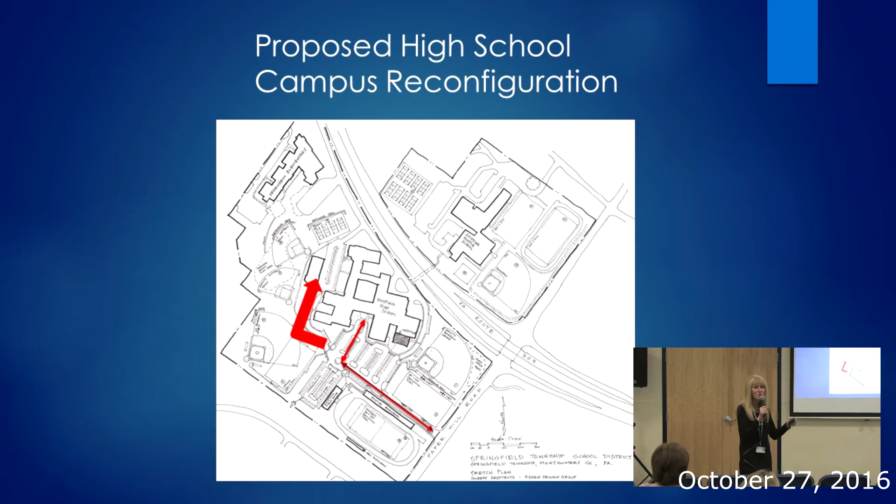So we did a survey. Did anybody here fill out the survey? Thank you, we really appreciate it. We got about 250 responses, which is phenomenal.

We're very appreciative, and before Dave comes on I want to quickly talk about the questions we asked and the results we got. These are actual results, unfiltered. I'm not commenting on what people wrote, this is what they said.

So the first question pertained to the stadium and track area. Do you have any additional suggestions? What are your concerns, comments, and so forth? The number one overwhelming question was not about the utility of turf fields, but the safety and the research out there that seems to be conflicting.

There's some research out there that says turf fields are fine, especially in this day and age. They're much more improved than they ever were before. There's no risk for health reasons, nobody needs to worry. On the other side of the coin, however, there is a body of research that says...

depending upon the types of materials being used, there are carcinogens in some of the materials, and some people who play for a continuous amount of time on turf fields can be at risk for health issues. We are looking very carefully at all of that research, and if we were to make the determination to go ahead with turf, Dave can address this because he's an architect and works in a lot of places that use turf fields.

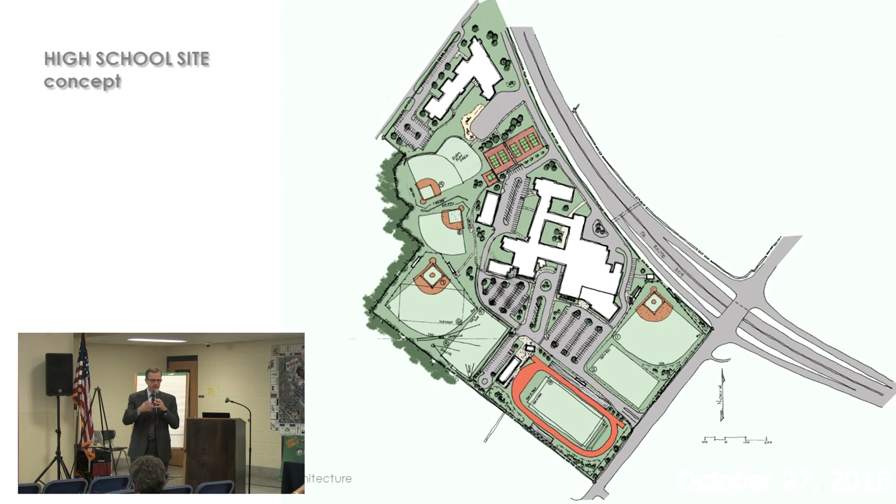What they'll do is the traffic study will be conducted at three or four different times during the day, and they'll try to pick up all of those major issues. There'll be rush hour times, and then they'll pick up all of the school access and egress times. So it's going to be a really interesting study. Might be a little scary to look at for all of us, but it'll be a reality.

So that's some of the circulation through. One of the other things you heard Dr. Hacker react to as part of the survey was the front door. Now, to some extent, it's kind of a misnomer that you don't have a front door. The front door is not visually accessible as you drive up. That's the reality. The front of the building is actually a pretty handsome building. It was reconstructed a number of years ago and is a good-looking front door to the building, and the question is how do you get people to it.

So that's what we're trying to do here. We're trying to create a bit more of a boulevard that you come down next to the stadium, and as soon as you get into that—we'll call it a parent drop-off lane, but it's a pickup and drop-off boulevard—it leads you right to the front door. So now there's a real visual access back and forth to the playing fields and back to the academics. Then we pick up a large amount of parking between these two areas, which will be an increase over the current parking you have. So that's how we structured the internal part of the site, and it seems to help out quite a bit with the circulation from Haws Lane as well as from Paper Mill Road.

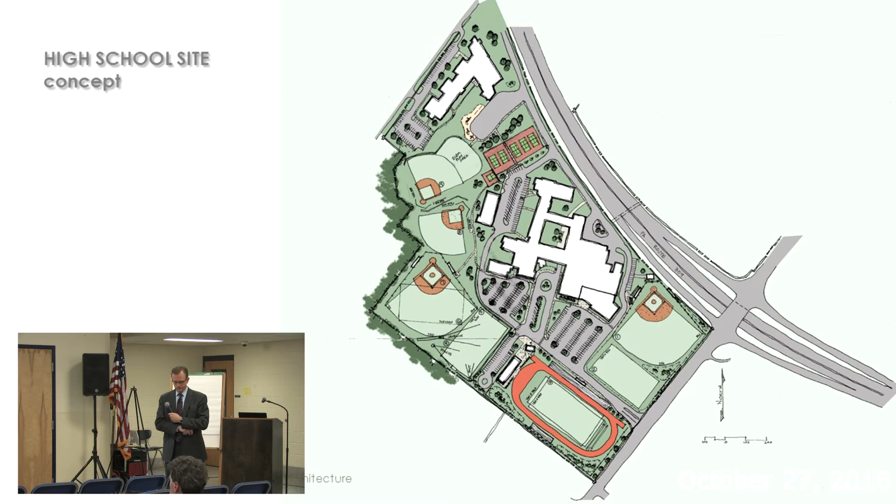So the other challenge then, once you get past that, is where do you locate all these? As that picture is configured, if that were to be the way it ends up working out, does that disconnect connecting Erdenheim? No, not at all.

Actually, I'm not orienting you very well. This is the parking lot that you likely parked in right out here, and there's the facilities building. So it sneaks around right behind over here and comes down next to where your current tennis courts are. So instead of it being by the cafeteria that you go around, you now connect it from the back. You could literally go through this parking lot and down and around. If it was sunlight, you would see it—it would be right out here. So you'd be connecting back this way instead of connecting in front of the cafeteria. Or do both.

So that starts to alleviate some of the issue with the bus turnaround as one of the major issues.

Back to the playing fields, when you count up all of your spring sports and fall sports, the end result is at any one point in time you probably need four playing fields plus a stadium, and then you need two baseball and two softball to make all of this work. That's about what it amounts to when you start to really stack it all up. So as you already heard, one of the things we'll be trying to do is redo the stadium with all of the playing lines, or at least three sets of playing lines, so that we can start to use that for multiple sports.

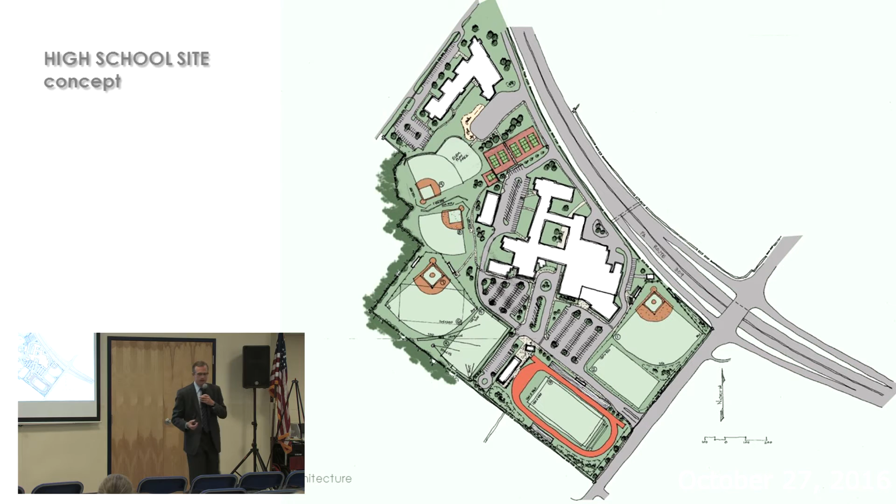The intent would be that we'd set this up as a soccer field. We'd set this up, depending on when it's being used for competition, as another one. And then, of course, you've got your field hockey. What we would do is set it up, and this is pulled up into the diamond, but we'd pull it back down into the turf itself, or the grass. I have to differentiate between turf and grass. So what we were able to get was three of those fields, and we're struggling to find the fourth. We're going to keep working on that until we get somewhere with it.

I don't know if my kids play field hockey. Why is it not just a multi-purpose field? What's going to make it specifically different?

The truth is, it is multi-purpose, but we're trying to set it up so it has an advantage for at least one of the sports that has a harder time on the other turf. It'll just have a slightly different depth to it — depth of turf, the type of turf it's laid with.

But other sports will be able to use it for practice. So in the spring, you're going to have not just lacrosse, but baseball that can't go into the fields but can still use a turf facility for fielding.

Exactly. Well, the same issues come up when you start talking about those sports — track becomes a challenge, right? And how you get all the track events. So we're going to have to find a way to get our javelin, shot put, and all of those things in an outfield area so that they don't cross paths during the same season. We're trying to set all of those pieces up so they all work at the same time, and as you can see, you've only got so much real estate.

It seems to be fitting, with the exception of one field.

I'm not really very athletic, so if this is a stupid question, I apologize — why can't you play softball on a baseball field? Why do you have to have separate ones?

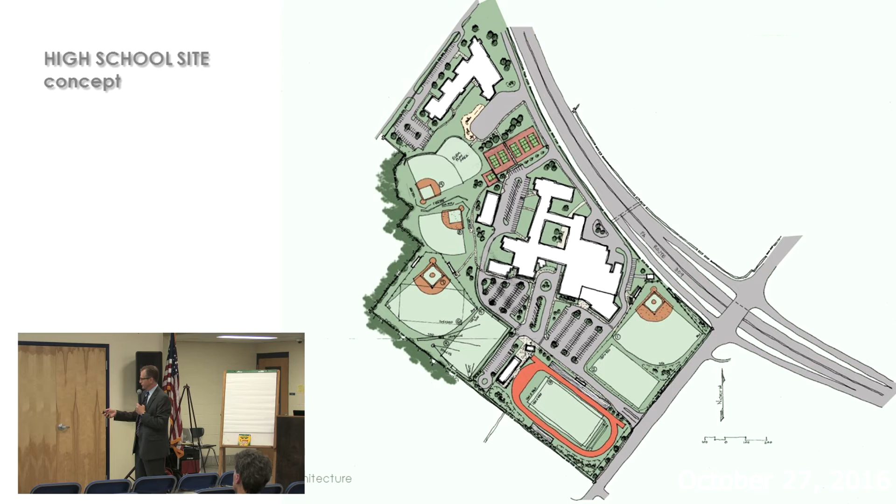Let me share a couple other ideas here so you can see what is starting to take shape. So that's kind of the site as a whole. We're going to focus just a little bit to try to get you a sense. And again, this at least you can tell is very sketchy. It's all sketch concepts, and we're just starting the process.

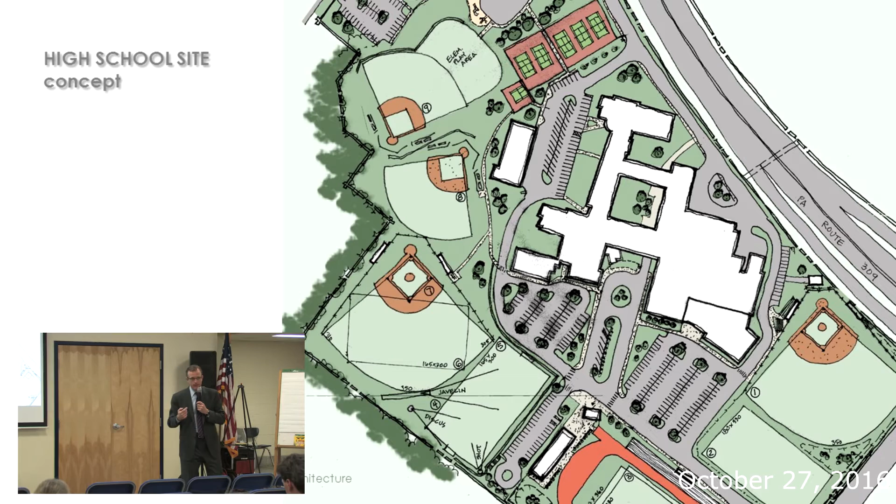So the circulation, a couple of things to take into account. You start to see a little bit larger paved area here, or sidewalk area. That would be what we would propose as a new entry to the athletic complex, the indoor athletic complex. So it would be the new gym entry. Some of those things that Dr. Hacker was addressing that are issues with the lobby entry area, with some of the athletic spaces that are available from the parking lot.

So would that be, and I'm comparing it just to Upper Dublin because we're there for a lot of sport events, would it kind of be like an athletic entrance?

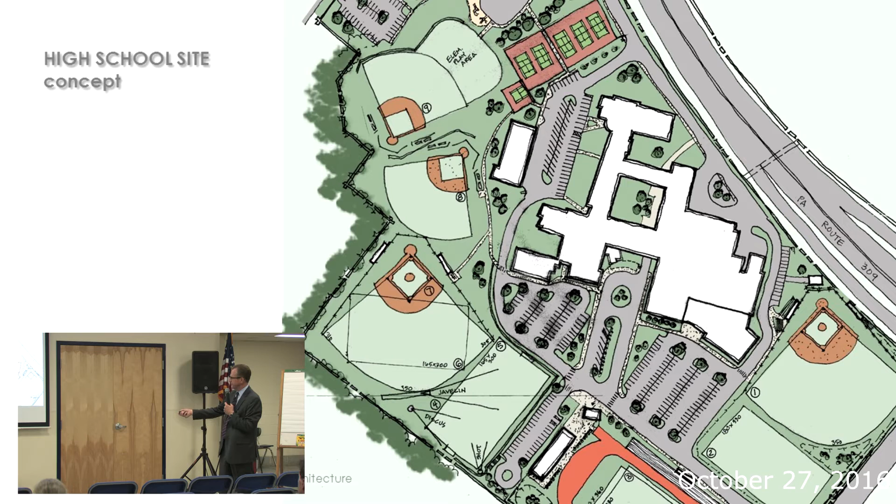I might be able to help you with that in a slide here. Let's see if we can get somewhere. So for better or for worse, we did take some shots at it, but this is part of why we're here talking to you, to get some feedback on these. So as you can see, there's a front entry, which you now would pull right up to, and then there's also an athletic entry. So just to show you, this is the parking lot, or the access points with the tennis courts and so on.

So we see this as a phase one and phase two, and there's a real reason for this phase one. The phase one, we're trying to get the field artificial turfed, or synthetic turfed, and I should say the stadium field, because the goal really is to have that as one of your swing fields while you're doing the construction on any of the other fields. And that's a really big issue.

But what it does is, if we can get this work done, it will give us at least a little bit of swing space while we start to do all of the work on these, so you can start to schedule some of this. That's not to say you're not going to be doing a lot of scheduling of your playing in other locations during construction of this, and that's yet to be worked out. We're just in the preliminary conversations about how you do that.

So that is a preliminary sketch of the beginnings of at least several of the different playing configurations and lining on that field. This is by no means an end result. So that's kind of the beginning of what you'll see.

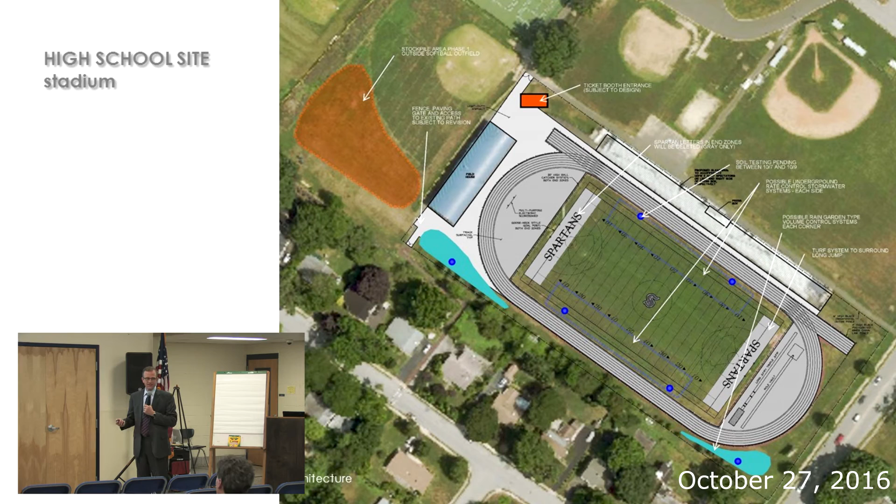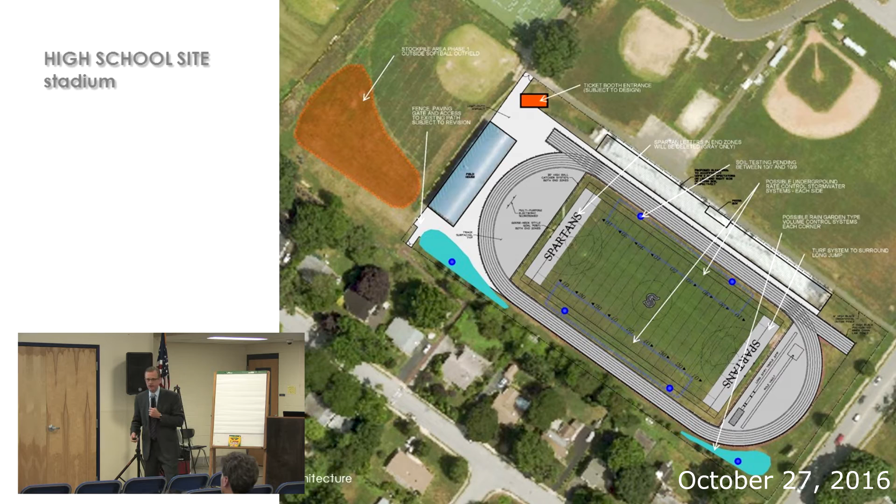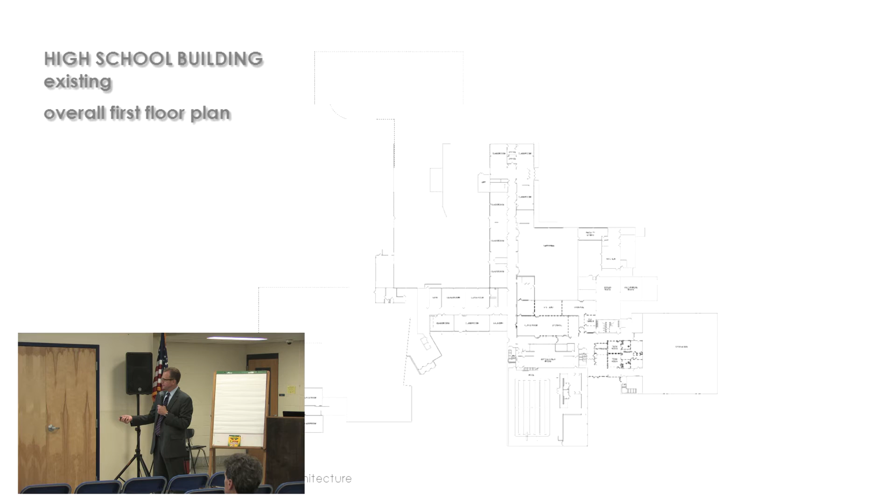This is a little hard to see, but this is the current pool, and here's your gymnasium, and you know this front entry point here. This is the entry doors that Dr. Hacker showed in the slides previously. This will get bigger, so don't strain your eyes yet, but if you watch the back and forth there, you can start to see where some of the work in the building will be done.

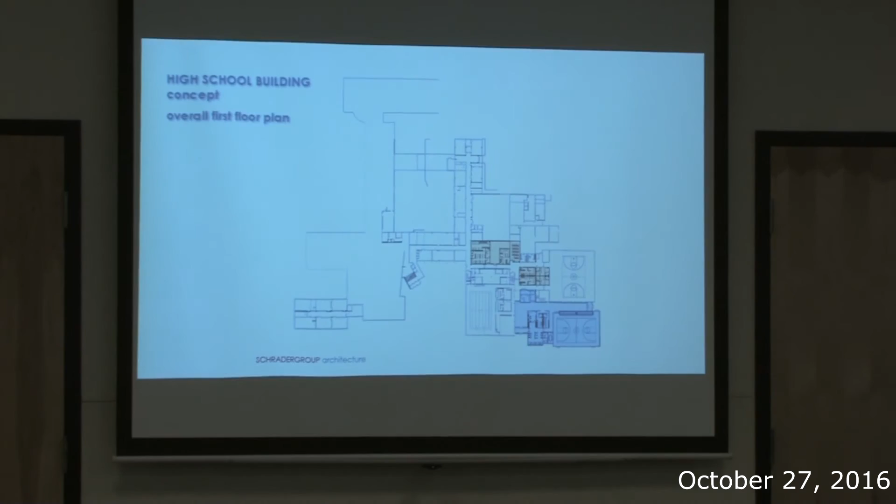So what we're dealing with here as we get into the spaces, we've got a variety of TV studios, classroom and athletic director spaces right here. We have team room, trainer, and so on in this space, and nothing out here. The girls' locker room, of course, is up above on the second floor. So what we're trying to do with this concept is bring the girls' locker room down directly across from the boys' locker room so that all of the locker room spaces, including a variety of team rooms, are now down on the ground floor.

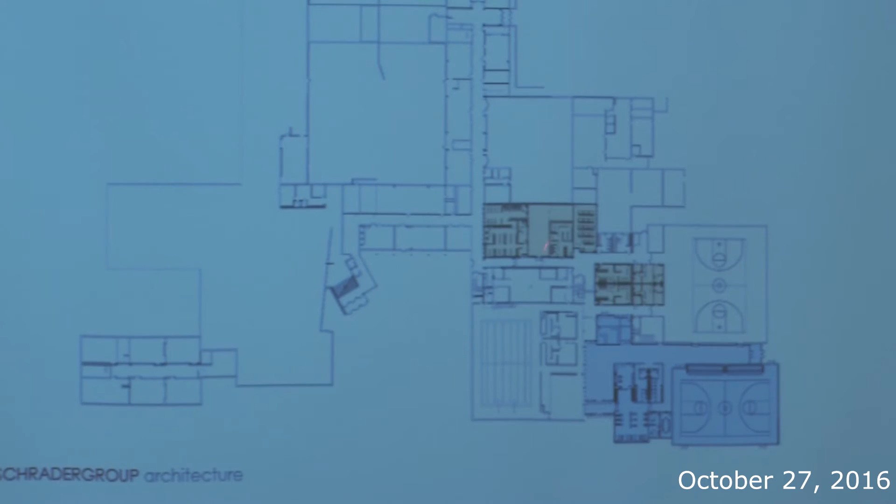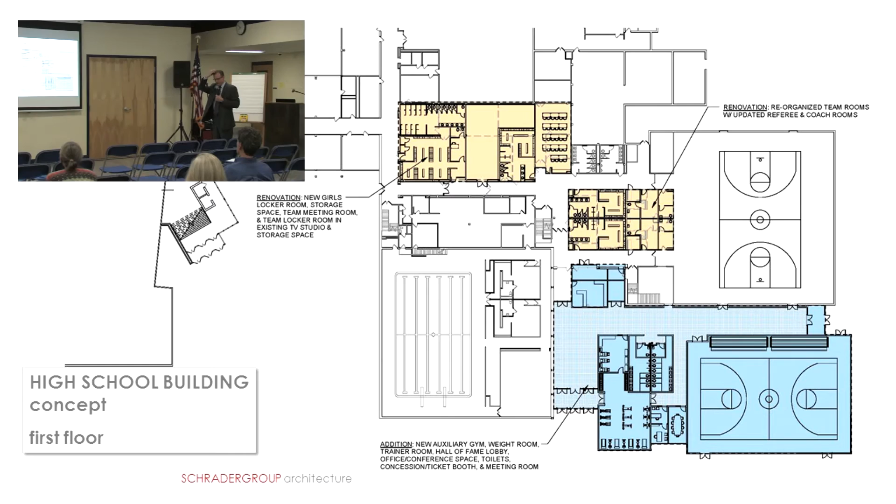So how does that work? This is a concept. A lot of times when we're looking at athletic facilities for performance, for evening use, for afternoon use, for events, we try to look at a front of house and a back of house. This front of house, which is the new construction portion, is where I, as the public, come to go into either of these facilities. So what you're seeing is the auxiliary gym here, and then there's your main gym.

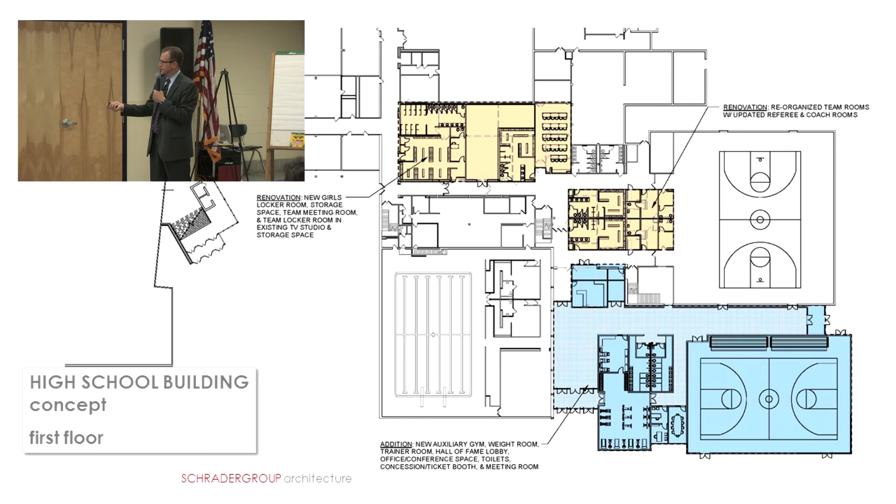What we're trying to do is a very wide main entry, kind of a Hall of Fame entry down from the parking lot, so you come right into that, and a very wide space between these two gymnasiums. Also in the front, a large bathroom area for the public. We've got the athletic director space, the fitness rooms and training spaces, and a concessions and ticket booth directly facing the lobby.

So there's a natural flow straight into that and then into one of the venues. The goal is to create a front-of-house athletic facility that, from the back of house, is actually all locker room spaces, so you're not going from floor to floor.

With one exception. For what's on the table right now, the $28 million, are there any renovations to the existing pool area? Not currently. We did not start to investigate that because we just heard about the concerns about the pool when we got the survey. I would say the aquatics program in this township is probably one of the biggest programs.

We currently have a 6-lane pool. You have 10-and-unders swimming up to 12-and-unders, you've got 15 kids in a lane, and it's dangerous. I don't see the sense in spending all this money on renovations without addressing the problem that our pool is beyond outdated.

If you had to name the biggest issue with the pool, is it the lanes, 6 versus 8? There's no place in the stands, you can't even tell. And the showers in the locker rooms look like they're still stuck in the 70s.

That we know. For the Springfield Aquatic Club that uses it, the girls' teams really don't have their own meets there because they can't have two swim teams competing against each other, and the girls' team is as big as the boys' team, it's huge. So we have not done anything to address that.

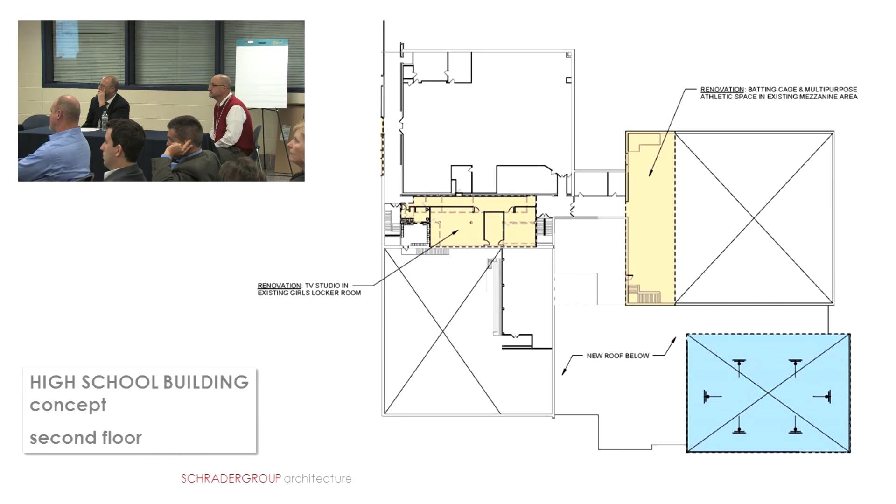We're not going to have sports teams going into our buildings. So then what goes where? Up above goes the TV studio—we brought it from downstairs up, so it's now right adjacent to the media center, where it should be, and the locker room is next to the locker rooms, where it should be.

Can we ask, what's the TV studio? We actually have a TV production program here in the high school. Students take coursework in TV production and design, so we actually have a studio for it. It's an academic area.

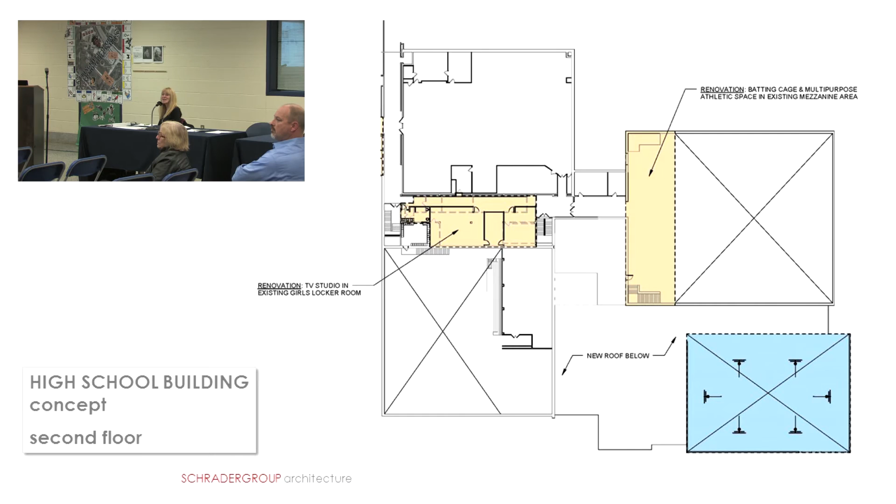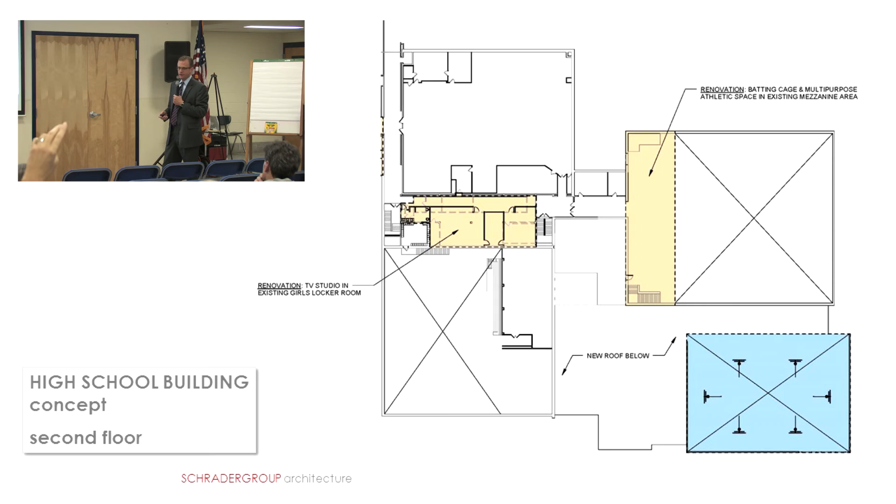I just didn't know if we were talking about the pool stuff, something to consider. If the pool was bigger, could they just somehow share the locker room facilities? Either sharing or figuring out how to get them right into that same spot, I think is a reasonable solution. Yeah, that's true.

This question is actually more geared towards either Dr. Rittenhouse or Dr. Hacker. Were either of you here when the last bit of construction was done on the gym area here? With the gym renovation, I was here for something for the floor, that was it. All right, then you guys probably wouldn't know.

There used to be a loft. Yeah, they filled that in. So what's there now? The fitness center is still there. How do you access it? The fitness center is also on the second floor, which is odd—it should be on the first floor. You go up a set of steps to get to the fitness center.

As a coach and as a teacher, it's difficult if you can't split your class. For those that don't know, if you're sitting in the big stands in the last row and turned around and stood up and knocked, that's where the fitness center is. It used to be open before, and it's just an odd thing that it's on the second floor.

So then would the fitness center also be being moved? Let me help you with that. The fitness center would come down here, so it's right in and amongst all of these spaces, plus it's also accessible from the playing fields. And to your point, the way you used to access this mezzanine was either up through the back stair or through the girls' locker room.

What we're suggesting is if the girls' locker room goes downstairs and the TV studio comes up, you create a corridor right adjacent to the media center, which should really be there, to access these points and get to that means of egress. The studio is right next to the library, which is great—some things they could work together on.

So then would the current fitness center become part of the new studio? That becomes another athletic space for you right here. Right now you do some batting in the gym—this would become a space that you could do that training, or use it for other athletics. The idea is to potentially move the batting cage there for softball, baseball, lacrosse.

The batting cage is now on the ceiling of the varsity gym. That's an unusual model—at other schools it's not typical to have a batting cage up in the ceiling of your varsity gym. That would be a multi-purpose place, and the kids could bang it up a little bit.

We beat up our gym—it's all good, I have a lacrosse player. But that floor is not made for lacrosse sticks and field hockey sticks, so they use it, of course, but it gets scratched up.

This starts to bring the pieces back to where they should be in the building. If it's a synthetic surface, you can play outside all year long. There's nothing wrong with playing outside in January or December—you don't have that luxury today.

Right, so again, these look like they're final drawings. In the rest of the world, these would be hand sketches, but today the computer is much easier to generate these things. So those were some of the concepts for inside the building.

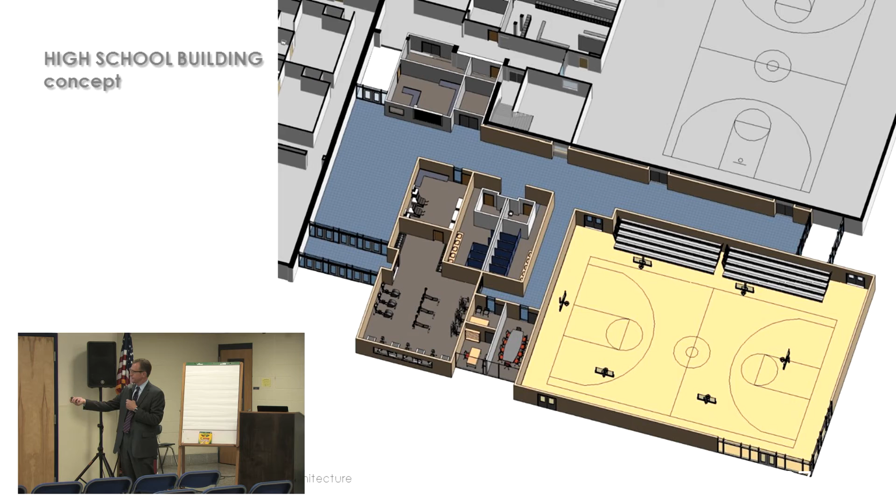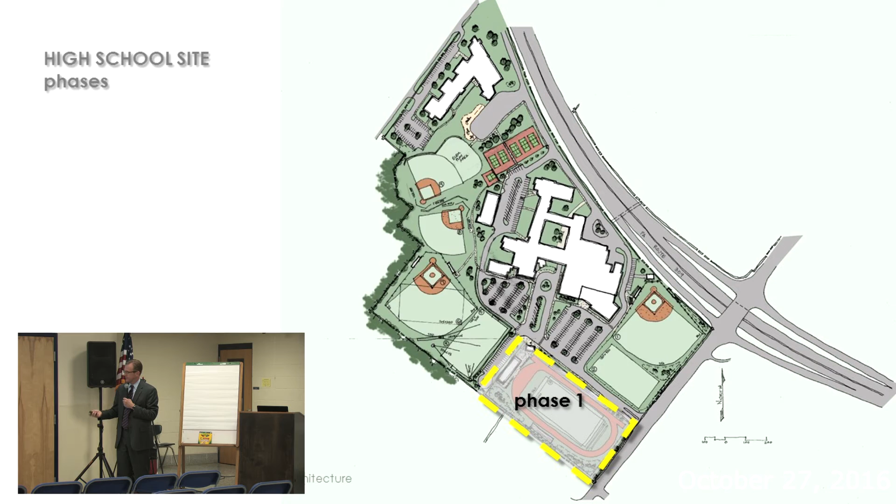So that's kind of how that's structured. I did want to talk about the phasing real quickly. We started to talk about how that works. Phase one would be that area, basically the stadium - the turf, the track, and some minor renovations, potentially that little concession building. Phase two would be the work around the high school.

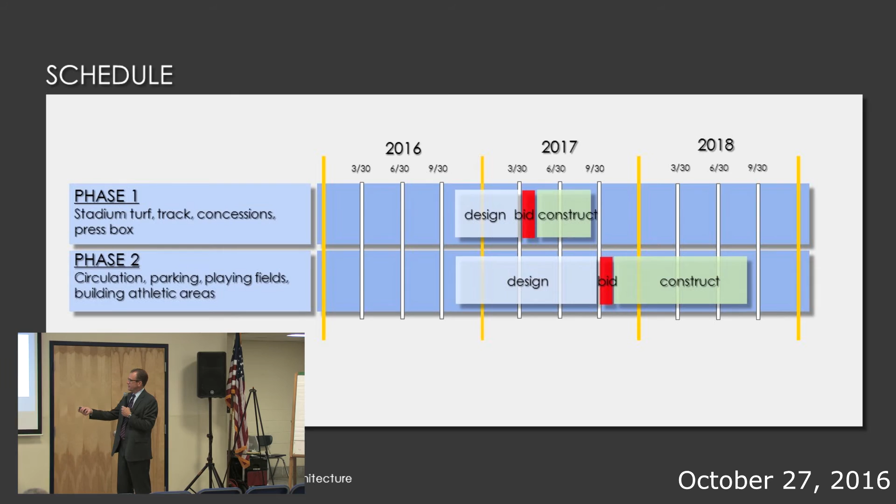What's your time frame on phase one? Well, that's the problem. Phase one, we think we can get into an approval process by March of the coming year. That would allow us to bid in the spring and start construction through the summertime, so in the fall theoretically you'd be able to start using it. How early in the fall? By opening of school.

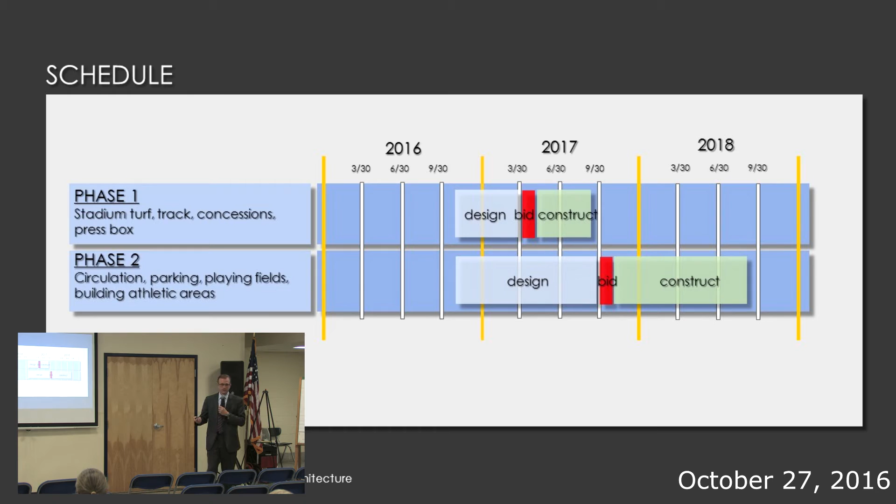So the turf's done, you move on to the turf, and then we start probably area by area around the building. The hang-up is that, as you know, planted fields take at least a full year's set of seasons before you can really use them. So we have concepts for whether we can do sod as an alternate, just to see what the price would be. These are all things we have to think about as we go forth, but we're going to try to make those playable as fast as possible to get everybody back onto the site.

Will there be drainage in those sports fields? There is drainage in those. Springtime, when it rains, baseball fields are useless because of the amount of water. Correct. Yes. How is turf maintained in the long run?

Is it maintained the same way as a grass field? Not at all. It doesn't take a ton of upkeep over the years, but it takes replacement at about a 15-year process typically. So does that mean we need less ground crew to maintain the field space if we're going to have less grass field space? Not less grounds crew, because don't forget they're maintaining everything else we're developing with the new fields around the district, but less maintenance on that football field and that field hockey field. No watering, no grass seed, no cutting the lawn - none of that has to be done. So there's a cost avoidance for each year you have turf.

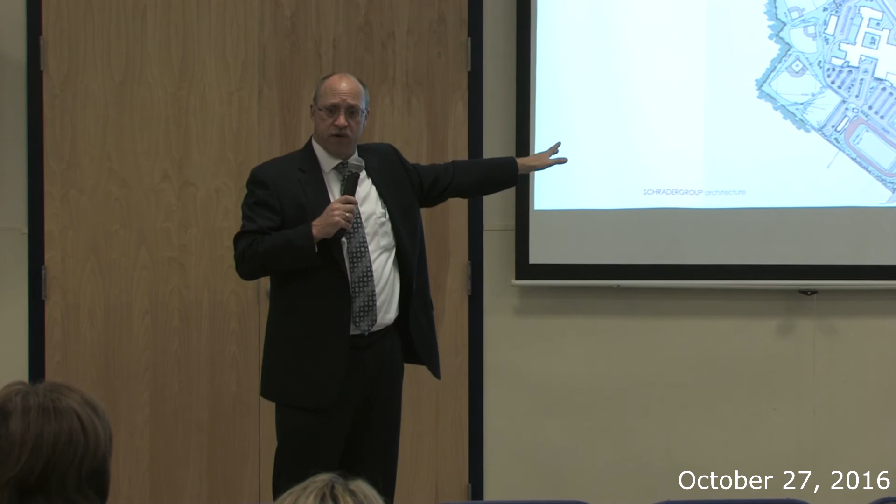So while we're going through all these discussions, trying to figure out what and where and how and when, we're also trying to figure out how to reduce the impact on the taxpayer. One, the use of our reserves. We'll know as we go through years 2 and 3 if we can use more, because we've got to remember we're doing these 2 sites, but we still have other sites that we have to maintain, and those reserves are used to maintain those other sites.

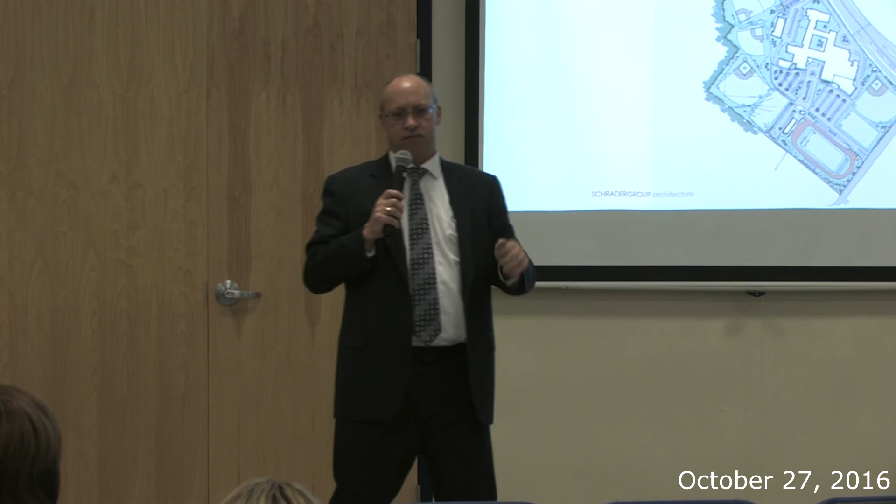In addition, Dr. Hackner mentioned we're watching the Teetsy property very closely. It's on Ridge Pike, next to the Masonic Lodge. We understand they are approved for development. The last information I have is that development should start in spring of 2017. There are 2 different components, one hopefully coming online in 18 months, the other 36 months later. When they're fully online, that is going to add about $1.1 million in additional revenue in the form of real estate taxes.

They have 2 different ideas for that. Atria, a skilled nursing facility, I think it's a 125 bed facility. Then they're going to build something called Squire Ridge, which is age restricted, about 130 rooms, but they'll come online slowly. Right now it's completely undeveloped.

Isn't there also proposed construction going on, half in Springfield Township and half in Cheltenham Township on Willow Grove Avenue? I've heard of that before, but I haven't heard anything recent. I heard last year or so, but nothing since. Cottage homes, I think they were talking about building. It's still not 100% determined, they're still going back and forth with the developer. The majority of it would be in the Black Rock area of the township, for those that don't know.